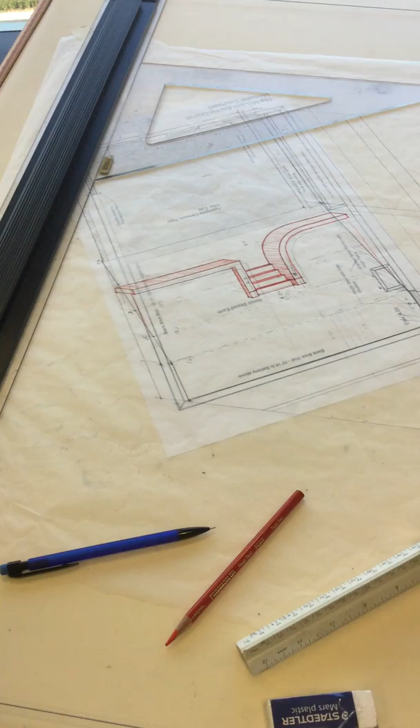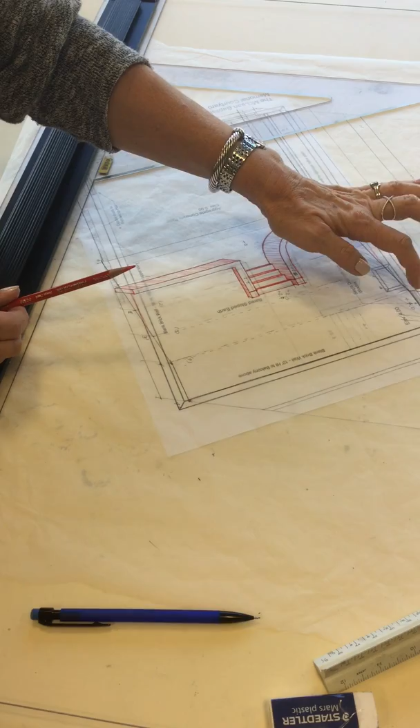Okay, I'm going to start one more stair exercise in axonometric. And so back to this drawing, what I have drawn underneath is, from the stairs that we just drew, a path going to the back and another set of 4 steps coming up to the doorway up here. So I'm just going to start at the doorway and work down these steps.

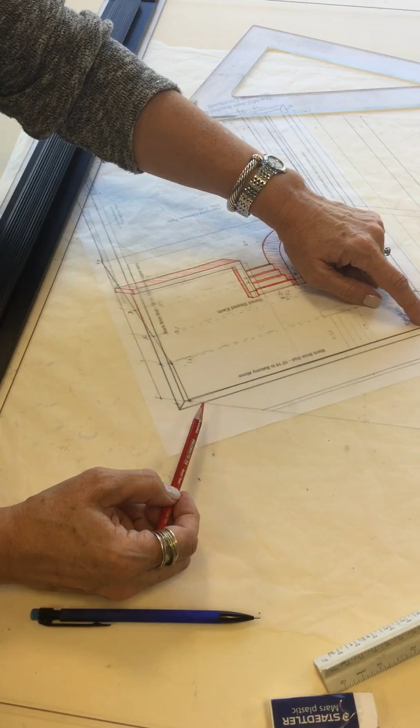So what I've done is I've moved my drawing. You see, it's no longer lined up with the patio underneath. Instead, I lined up this corner with the doorway, which is 4 feet up. So you see how this is off down here. So the line that I had drawn before, which is the back of the garden at 4 feet of elevation, coming around the corner to the sill of that door, that's what I'm lining up with the plan underneath.

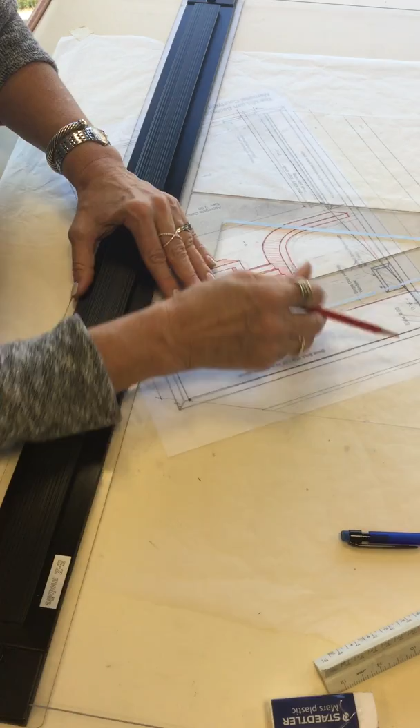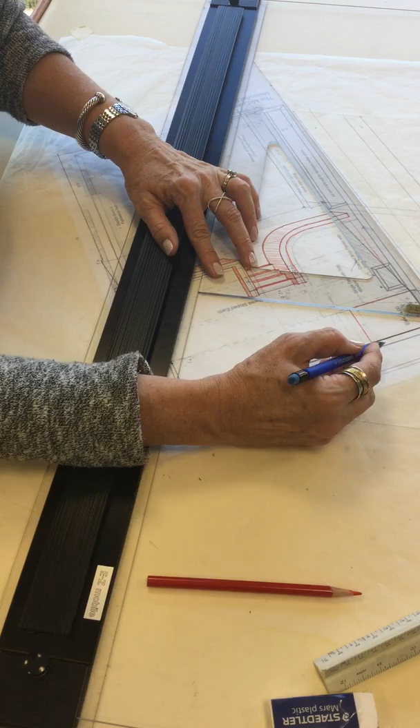And that allows me then to trace the path that I drew on my drawing underneath, and I'm going to go to my red pencil to show that this is all sort of flat. And here is where my first step is going to happen. So this is all at elevation 4. And so to draw steps from up down, I go back to drawing a vertical, which is always how we start. And you see, this is the top of my step, the first riser. I'm going to draw verticals downwards from that on both sides, because that's the first riser coming down.

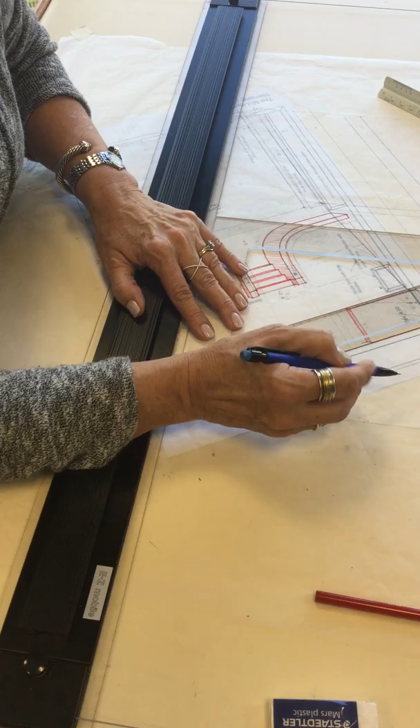And then I'm going to take 6 inches, which is the riser I'm using on this project, and with my red pencil, I'm going to draw in that first riser. So you see how we are already coming down 6 inches. So the first step is going to be down here. Now this time I'm just drawing it to show you. I can draw it without moving my drawing to trace it. But let's move the drawing anyway.

So I'm going to pull the drawing downwards this time so that I can trace that tread. There we go. I'm going to trace the first tread, which I started to do here, and here, and here. So you see, that's the first tread down.

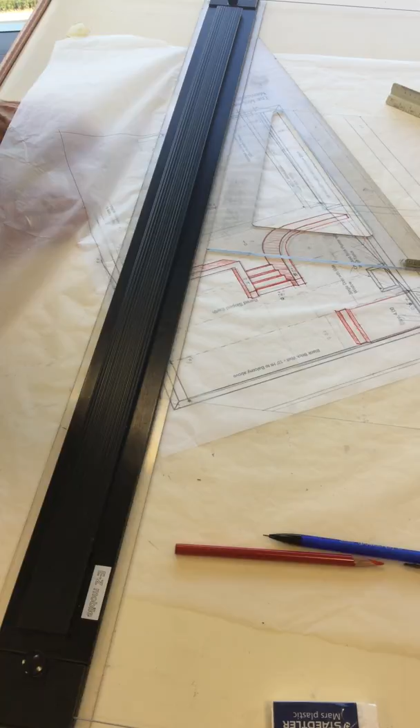So to get the next step in, I'm going to draw the verticals from both ends of this step. I'm going to go down 6 inches with my scale, and I'm going to draw in that riser that I just created. Don't forget the little verticals at the ends. I'm going to color it in so you can see it. And then I'm going to move my drawing so I can trace the tread that is related to that step. And here we go.

I'm hoping that this set of stairs will clarify what I was doing earlier from the different angle. There's my second tread. I'm going for my third riser now, verticals downwards, 6 inches, and third riser coming up, little verticals. Third riser. I move my drawing to get the fourth step lined up with it. There we go.

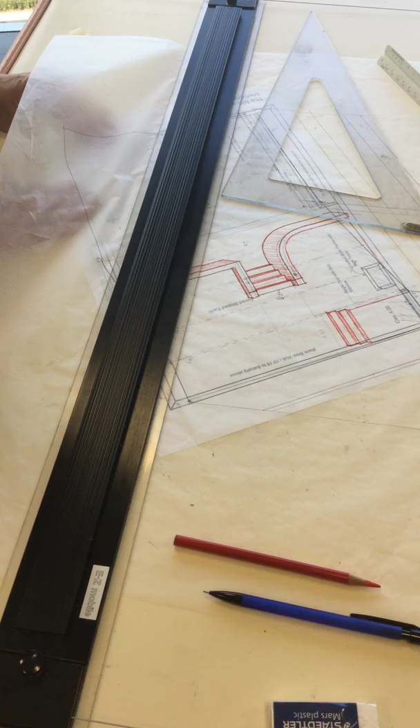There we are. And one more, because there are 4 risers here. 6 inches. My little verticals. And now we are to move this one more time, because we just went down 6 inches. We have to move the plan to there.

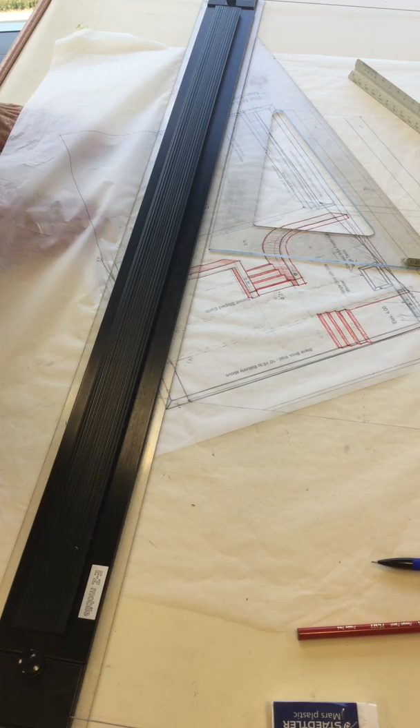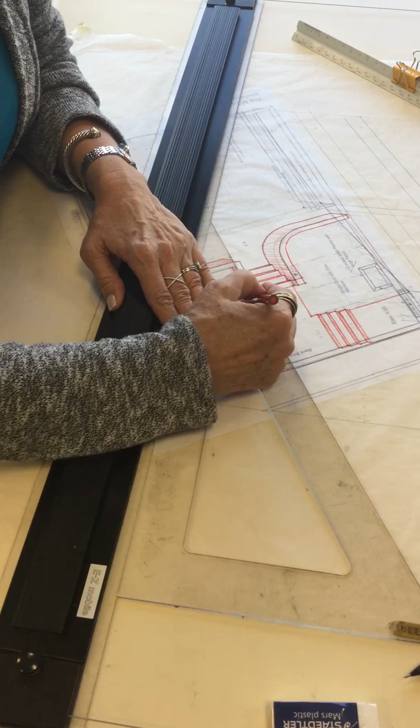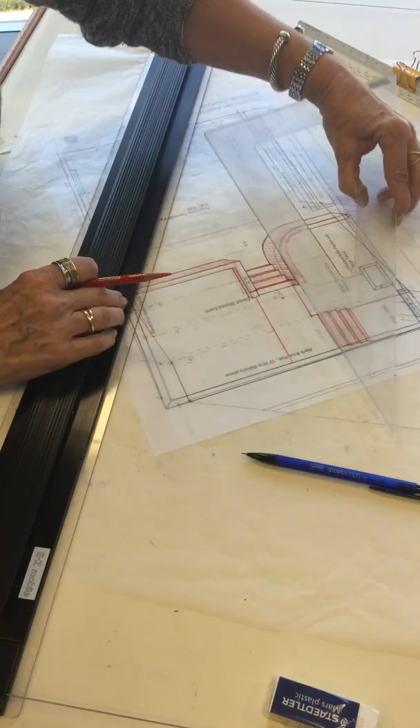And surprise, surprise, if I just trace the walkway that I had created underneath, it lines up almost perfectly with the pathway that I had drawn earlier. Now, of course, look at this. We need an edge to the stairs here. So for that, we probably need a cheek wall, which I had sort of neglected to draw when the drawing was up at the top. But I could get it in just by using projections.

So we had a wall that is flush with the walkway at the top, and flush with the first step, like that. And probably, if the wall comes all the way out, it would come this way, and would be here. I don't want to cover up the steps because of the way I would like you to see them drawn properly, but basically we'll have a little wall under there.